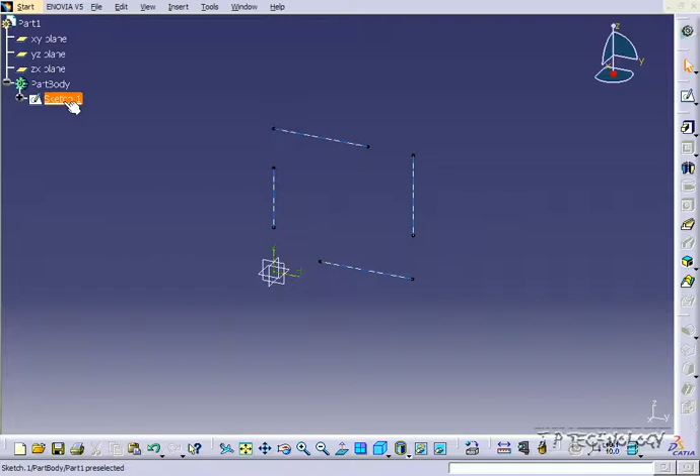Once you have it loaded, let's go into the sketch. So let's double click on the sketch, and now we're into it. What we're going to do in this tutorial is go through the trim extend features within CATIA V5. These are the trim features that you're able to choose from.

You're able to kind of just delete an entire section or break it, it's up to you. The tool I'm going to specifically focus on in this tutorial is the trim. So what I've done here is set up some lines, and we're going to trim and extend these lines to make a square.

To start off, let's click on the trim. To use it, you click on a line, and then you move it, and it's going to move one of the points up and down until it touches. So I'll show you. Let's trim this line and make it touch that line there.

Let's click this line, and you can see that we now are able to move it up or down. We want it to go to that point there. To make it go just at that one point, we're going to highlight this line here. So now it's in line with it. Click, and now it's in line.

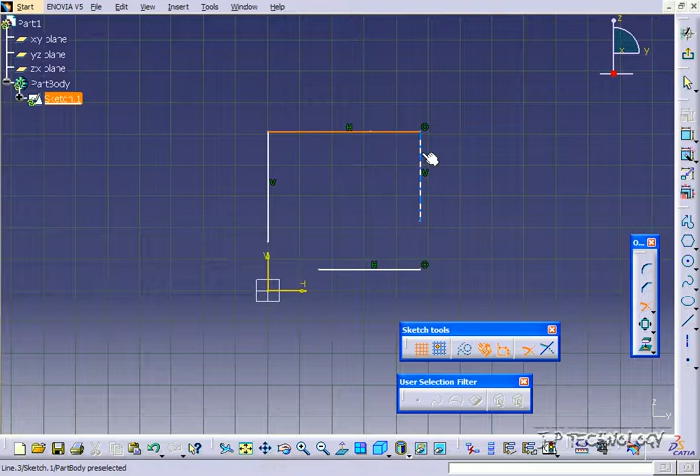Now let's keep going around and finish the square. We'll make this in line with that. Make this one in line with this one. And let's make this one in line with that one there. And now we've made our square.

Being able to trim different edges and whatnot is a very powerful tool in here. You're able to piece together sketches and then trim and extend everything until they complete a whole profile. So I'm going to show you another one.

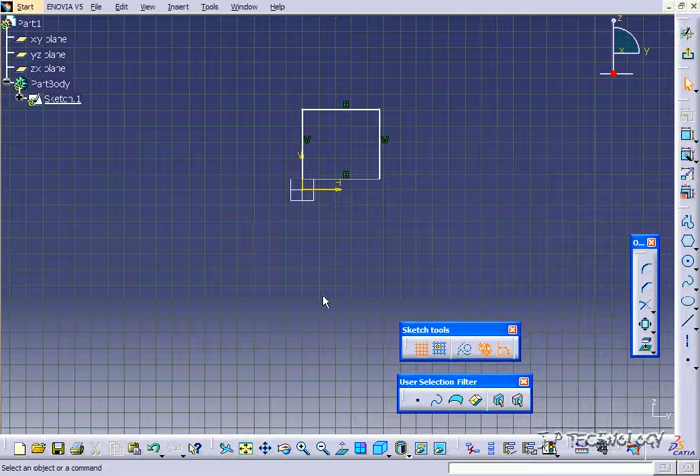So I'm going to make a few lines, and we're going to make a triangle. In this one we're going to trim them. In the last one we extended everything; this one we're going to trim the edges.

So let's click trim, and what you have to do is click on the side that you want to keep. In this case we want to delete this side and keep this side.

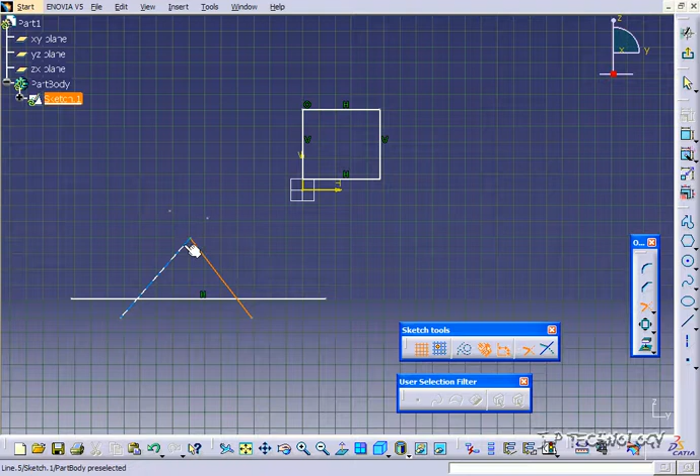Let's click right here and bring it up to that line. As you can see, it's deleting that other line, so you're going to have to move it around until you get the result you want. We want both of those at the top to be gone, so bring it to the side there, and now we've got both. Now let's do the same to the bottom.

Let's keep this side here, and we'll trim this one here too. And now we've got our triangle.

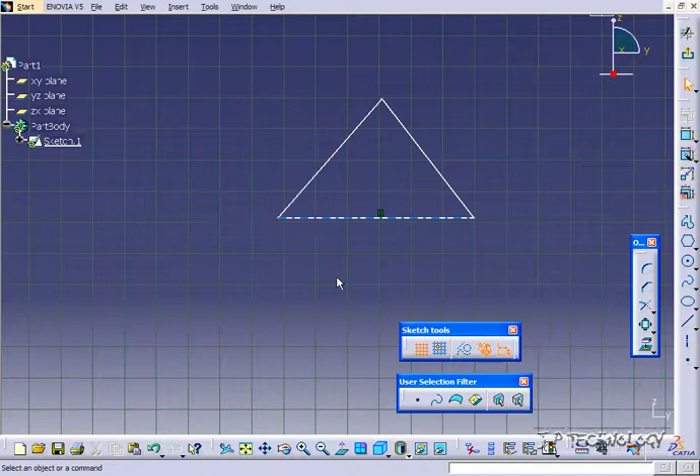Now let's take the circle and put it on the top of the triangle here, and pull it out just a bit. Now let's try to trim some of these edges so that we have just a single profile.

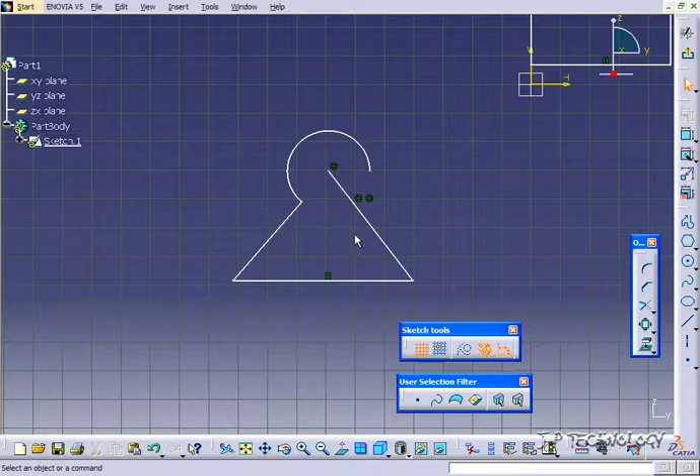So let's click trim. We want to keep this side, so we'll pull it up to there. We'll do the same to this here, and bring it around until it touches there. Now we've trimmed those sides.

This is a great tool, as you're able to piece those together and make the profile. If I wanted to do this independently, I would have to do a 3-point arc and slowly build all these together. Using the trim, you're able to throw all the objects in there and then start trimming away the excess. So the trim tool is very, very powerful.

The more you play around with it, the more you'll know. You just have to use it to learn and to know when to use it. It's a great tool, and it'll help you put sketches together quicker, easier, and get the results that you want.

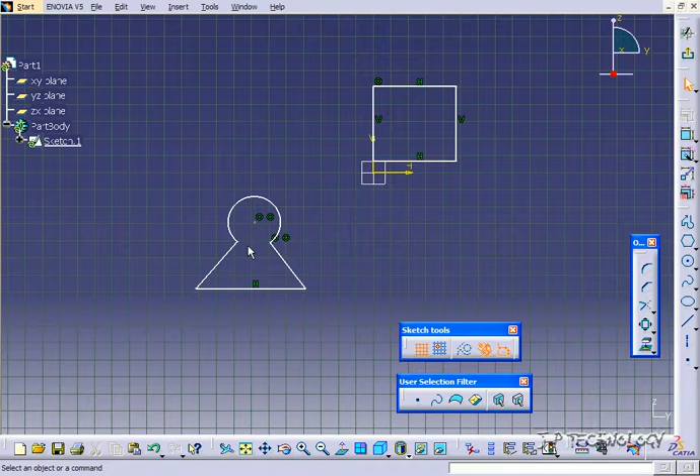This concludes our tutorial on how to use the Trim Extend Sketch feature within CATIA V5.